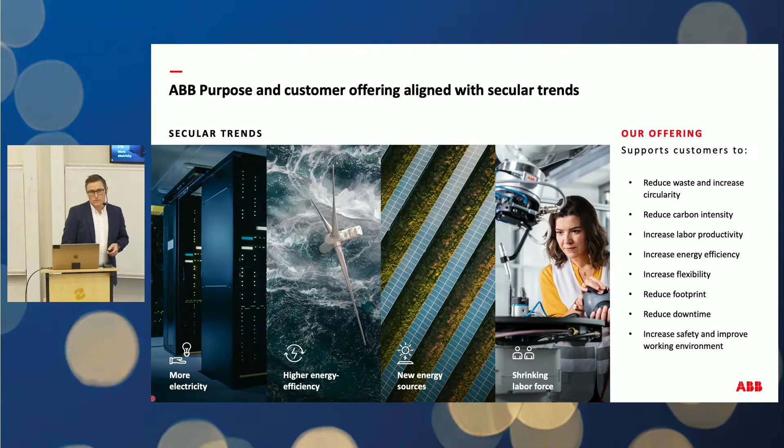ABB has around 140 years of history. I think it's 104 here in Sundsvall even. So we've been around for a while.

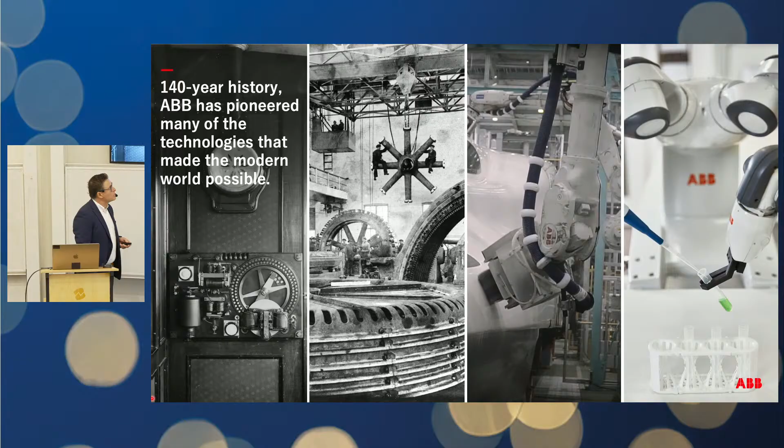The next picture is the world's first electronically controlled robot, released in 1974. We also had the world's first industrial painting robot in 1969. Then in 2015, we released our YuMi, the world's first truly collaborative robot, where human and robot can collaborate.

We serve customers in a wide range of industries, everything from nuclear power plants, oil, gas, pulp and paper - that's mostly here in Sundsvall - and mining and minerals, where I'm at. So I have quite wide expertise in many different domains.

Our people strategy is to empower employees for large engagement and encourage an innovative culture. We like our people to be innovative, think out of the box, and see new opportunities. Each employee is free to take large responsibility for their own growth and how they choose to collaborate with other parts within the organization. We also want to make an impact, working for a sustainable, equitable, and inclusive workplace and society where we operate.

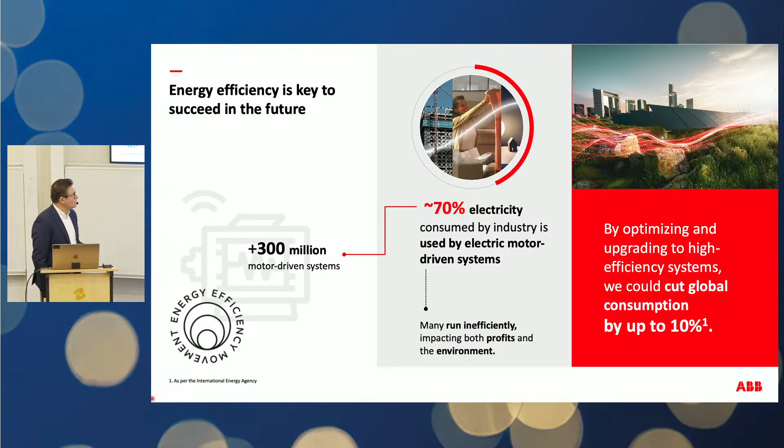As I mentioned earlier in the secular trends, it's going toward a more energy efficient future. We see that there are more than 300 million motor-driven systems in the world, and 70% of the electricity consumed by industries is using electric motor-driven systems. Many of those run very inefficiently, are old, and not controlled by drives. This could be both a profit and environmental impact opportunity for those having them. By optimizing and upgrading to higher efficiency systems, we see that we could cut global consumption by up to 10% within the industry.

Am I running too fast?

Okay, so adapting to renewable energy. We see that the increase of electricity generation with PV and wind is increasing constantly and at a high rate. We also see that global battery storage has had a record increase the last years by 136%. So more and more industries are adapting to using renewable energy sources.

And one hot topic nowadays is hydrogen. I'll show a couple of customer cases where they are trying to adapt to only use renewable energy for the production.

So we could start with Lhyfe. It's a small factory that produces hydrogen, which was commissioned in 2021. They have 2.5 megawatts of wind energy that they use to produce green hydrogen. We've helped them so the complete system, both electrification and automation, is ABB.

Then we have an upcoming H2 Energy that is to be commissioned in 2027. They aim for having 1 gigawatt of wind energy. And with that, they want to produce 90,000 tons of green hydrogen, e-fuel, methanol, and ammonia as well.

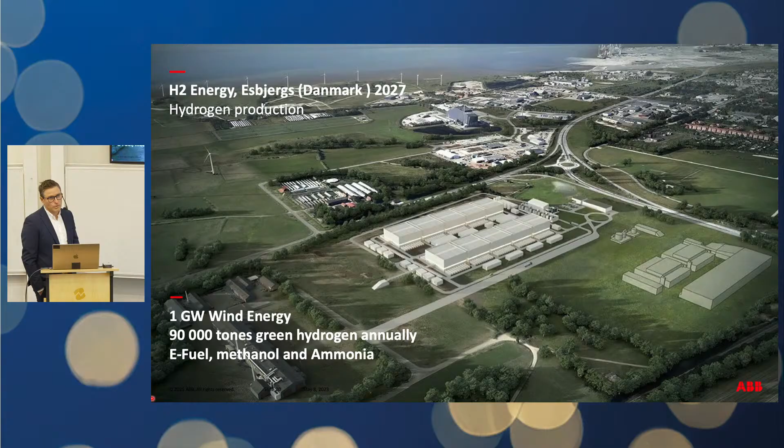So we see there's a big trend in going for renewables, and hydrogen is maybe a good way to start, because the hydrogen landscape is quite complex, but also flexible and can be very efficient.

Hydrogen production can use both renewable and fossil sources, but the big advantage is that the product of the hydrogen can also be used to capture CO2 emissions, lowering global emissions by producing e-fuel with hydrogen. So can we reach where we use the renewable resource energy to produce hydrogen that we then use to produce e-fuel and also capture carbon? That's a great win-win for both the industry and for the sustainability, or for the future environment.

So this involves a lot of different energy sources and also different applications or different end users. And hydrogen for e-mobility is set to grow about 6 times in the coming years.

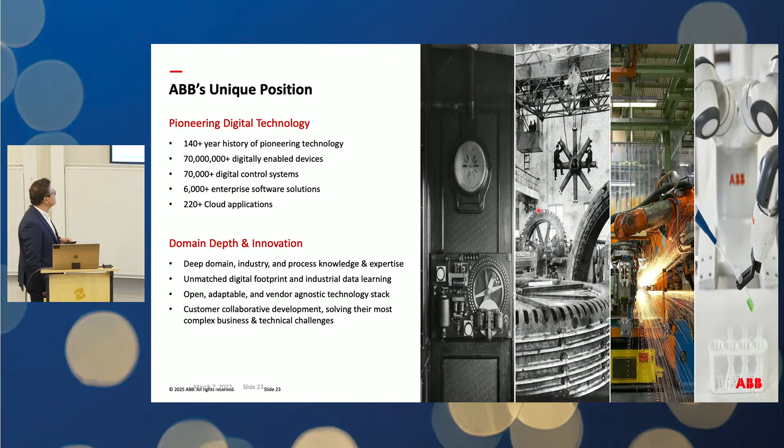Our products are very open, adaptable, and vendor agnostic, the technology stack we use. And we promote having customer collaborative development, solving their complex business cases and technical challenges.

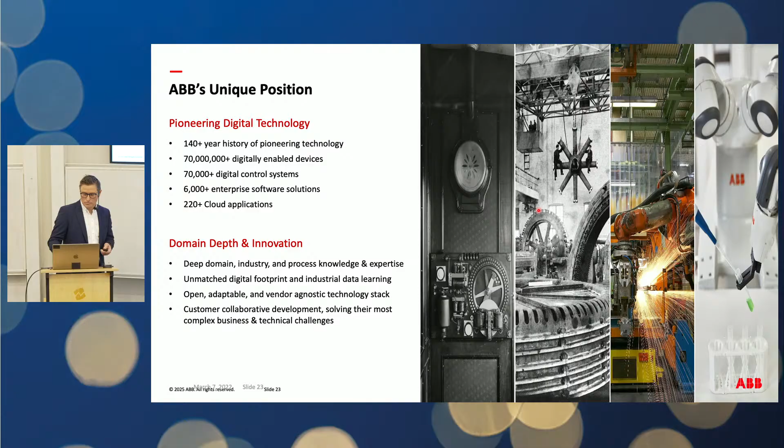So a bit of the digital history and automation part of it. In the 1960s, we started to use microcomputers for the signal processing. Before that it was mostly analog.

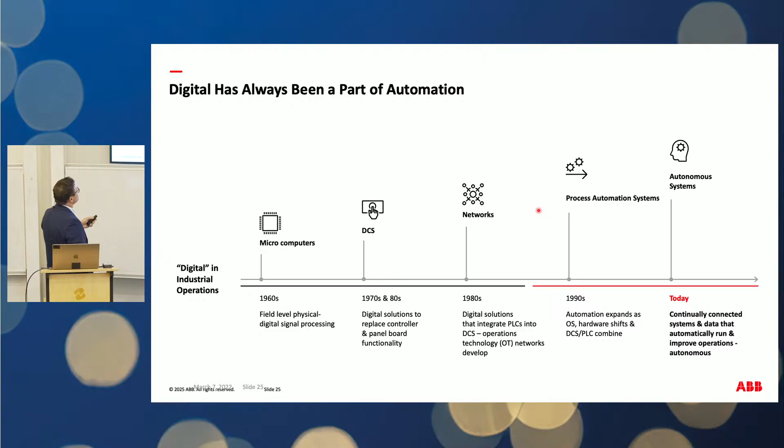In the 1970s and 80s, we started to replace controllers and the panel board functionality with more computer-based solutions. Then the 1980s was the start of using more PLCs and integrating those into what we call DCS, distributed control systems. And that's also when we started to see what's now called OT and the networks for the operational technology.

In the 1990s, it expanded, and the OS was more going into IT, the same OS as IT is using, and hardware also shifted, and there were more and more DCS systems and PLCs that were combined.

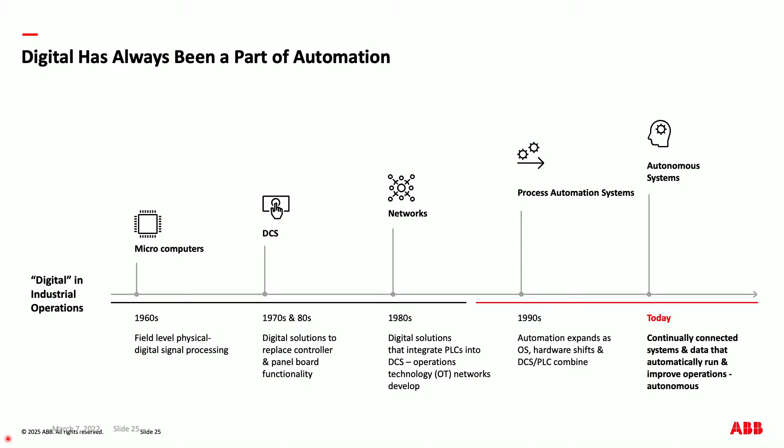And today, we're continuously connecting systems and data that run automatically to improve operations, and also aiming for and using autonomous capabilities in the industrial system.

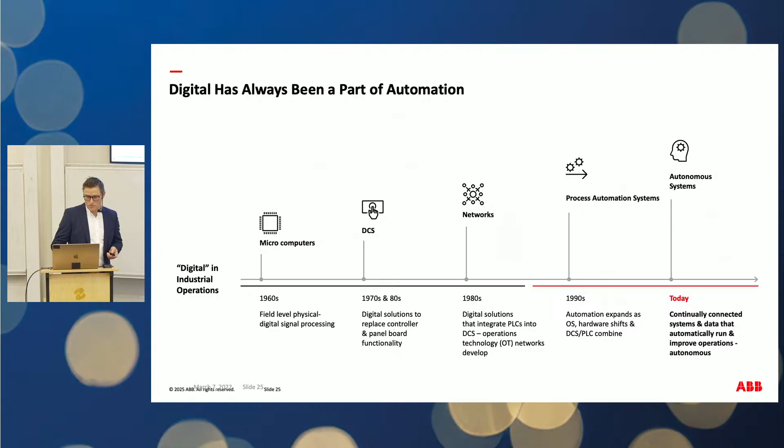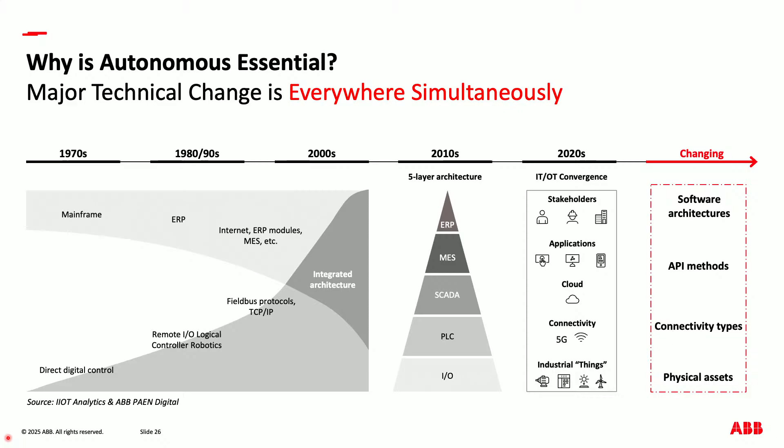Now you started to implement that on the OT as well. So it converged more and more, and it's moving more toward using the same technology as IT is using today, so that is also used in OT. Things like AI, machine learning, and stuff like that maybe weren't in OT before, but are starting to come in there, and we see a connection between the IT and the OT environments.

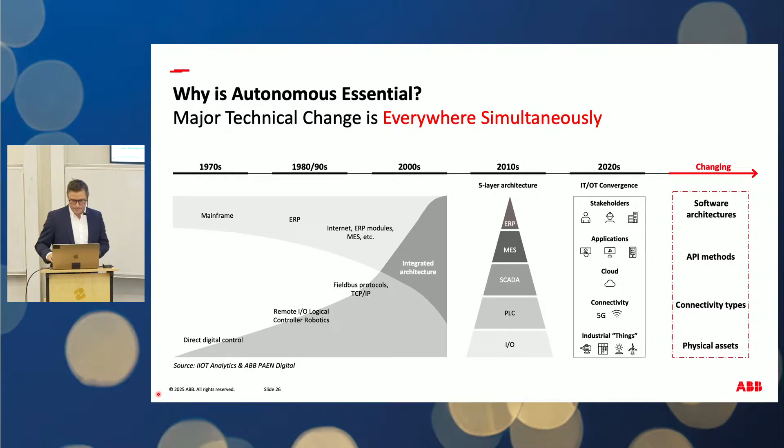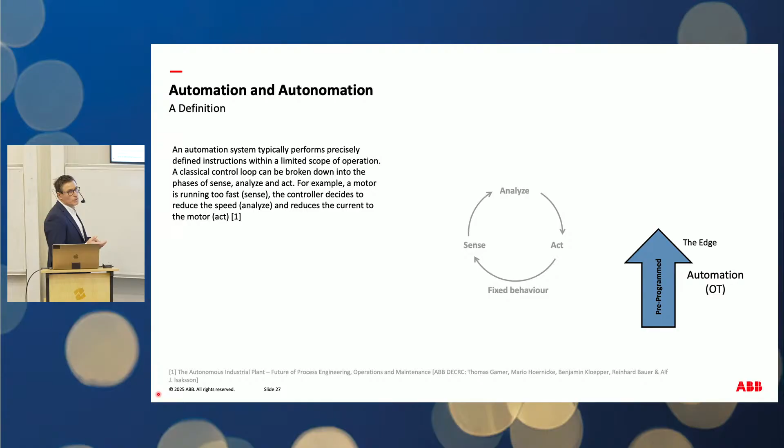So here they call it autonomation - I don't know why, but it's more about going from automation to having automation be more autonomous. If you look at automation, it's a fixed behavior. In a PLC that you run, you have something you need to sense. For example, if you have a motor running too fast, you sense that, the PLC or controller decides to reduce the speed, analyzes that, and then current is sent to the motor, and the motor slows down. It's always the same fixed pattern on the automation layer.

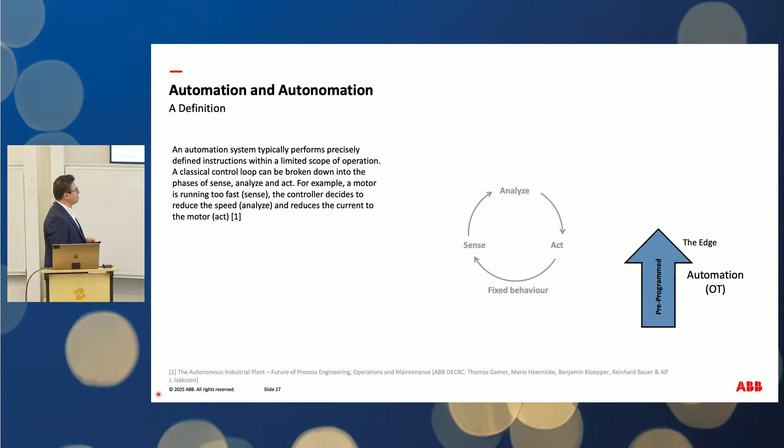But when you start applying AI and machine learning on that, you have a different shell upon that. You still need this fixed behavior, but you also need to perceive what's happening in the process, understand what corrective actions you should take, and then solve it. So it becomes another feedback loop surrounding this OT part, and that's what they call autonomation here, but it's more about using AI models and machine learning upon automation.

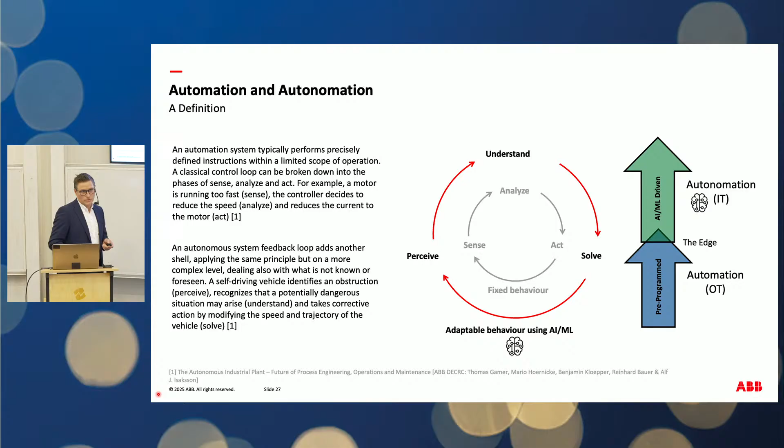Autonomous operations can be divided - you don't have to go from just letting everything run on machine learning. You could divide it so that you have a solution provided by an AI or machine learning model, which you approve and then act upon as a human. Or you could have different kinds of solutions provided to a human, and the human decides which of those to choose and then acts upon that.

But then you could reduce the human interaction more. So you have the AI and machine learning decide which of those solutions are best, and then just have a human confirming that. That's what we call augmented operations - we augment it with the help of AI. And then going to totally autonomous operations, there's no human involved.

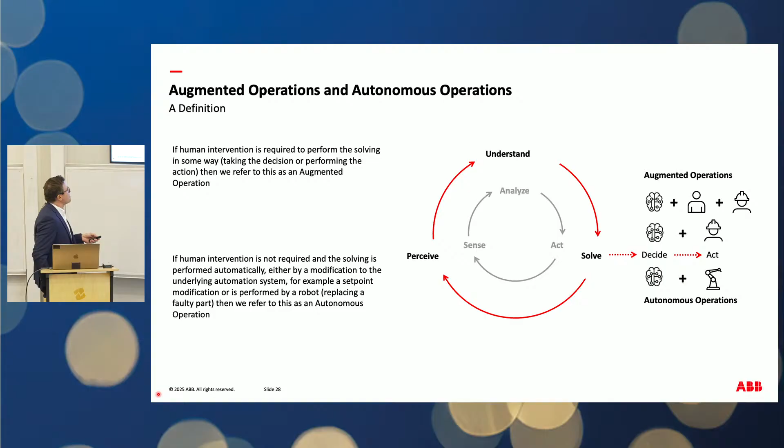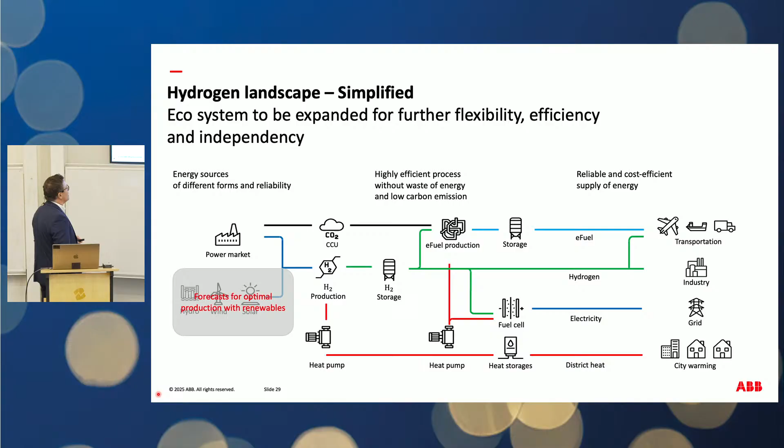So if we go back to this hydrogen landscape, it's quite complex with a lot of different streams and different products. I doubt it would be possible to have this up and running in an optimized and resource-efficient way with only automation and nothing more. So if we look at where we could use some kind of digitalization, machine learning or AI models, different models - we maybe want to forecast...

how we could use renewable energy sources for optimal production. We also need forecasts from our systems on which product we should produce right now at the lowest price, and maybe also with the lowest CO2 footprint, depending on what customers require. And then, most importantly, to have this run as efficiently as possible. One of those could be using AI and machine learning models for predictive maintenance to keep the process optimal and have optimal performance.

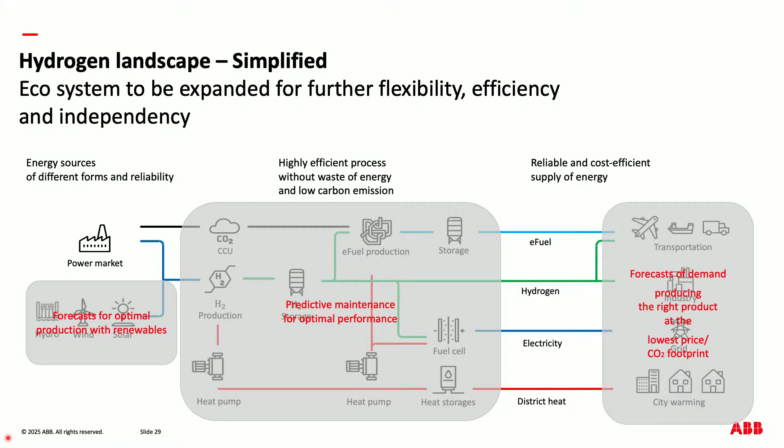In terms of ABB, software, digitalization and AI, more than 50% of our R&D employees are in software development - that's where we put a lot of focus. We have more than 250 AI-focused projects running across the ABB group today. Our strategic priority is to increase the digital content in our offering and embed more and more software into instrumentation and other areas, to be a differentiator. We also continuously develop software and digital services organically and try to do bolt-on acquisitions when we need.

So if we take a quick look at how our orders are spread: 83% of the orders we receive are on products and solutions, and 17% on services that we provide. When it comes to digitalization - software that is digitally enabled in products and services - it's around 60% of all those orders that are digitally enabled products and services.

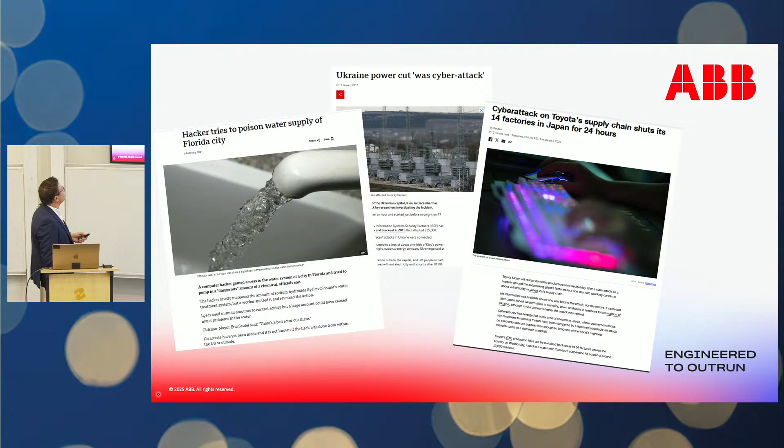So with digitalization, machine learning and all that comes some challenges. Let's look at a few attacks, maybe not in recent time, but in industry generally - we saw hackers try to poison water in Florida. There was also a big cyber attack on the electrical grid in Ukraine in 2015, where I think 225,000 Ukrainians had a power outage. And in manufacturing, Toyota had a big supply chain attack, which resulted in them needing to close 14 factories for about 24 hours - a huge loss of production.

So, cybersecurity and the challenges with that - we see that the cost of cybercrime is set to reach about $10 trillion by this year, actually.